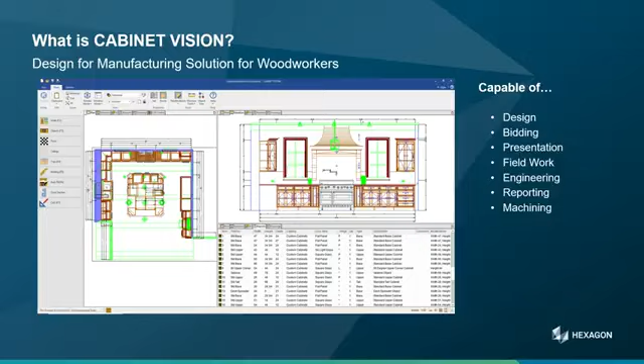The Cabinet Vision product focuses on the woodworking portion of the wood, stone, and composite segment of Hexagon Manufacturing Intelligence. This is probably a good time to cover the primary segments of the woodworking industry that Cabinet Vision is focused on.

The biggest segment is residential, where over 70% of cabinet manufacturing occurs. This segment covers kitchens, bath, bedroom, and closet cabinetry.

The segment with the largest projects is the commercial segment. The cabinetry in this segment are typically manufactured for hospitals, clinics and schools, and other institutional settings.

The store fixtures segment includes manufacturers providing commercial displays for retail establishments, which are typically custom with highly complex joinery.

The architectural millwork segment manufactures hardwood and softwood cut stock and dimension stock, wood windows and doors, and other millwork including wood flooring and moldings. These wood products are sold mainly to housing and other building construction industries and their contractors, in addition to other wood product distributors.

Cabinet Vision is a truly global product and is available in 14 different languages. Cabinet Vision is the market leader in several countries, including the United States, United Kingdom, Canada, and Australia, and we continue to strengthen our presence through our value-added reseller partners around the world.

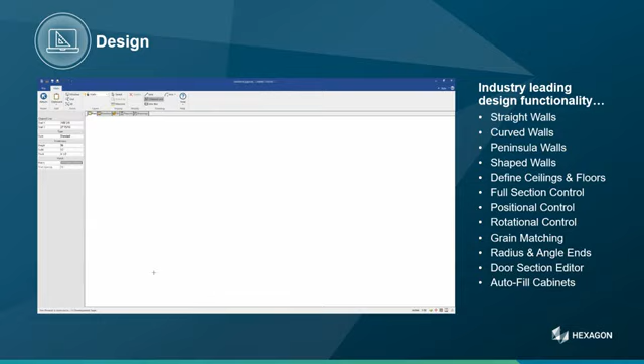Cabinet Vision has all the tools available to allow designers to design any kitchen, closet, bathroom, break room, or exam room they can imagine. Notice, as I draw the walls around the room, I drag a direction, then enter the wall length in the sidebar. This allows me to quickly lay out a room to begin the design process with point-and-click ease.

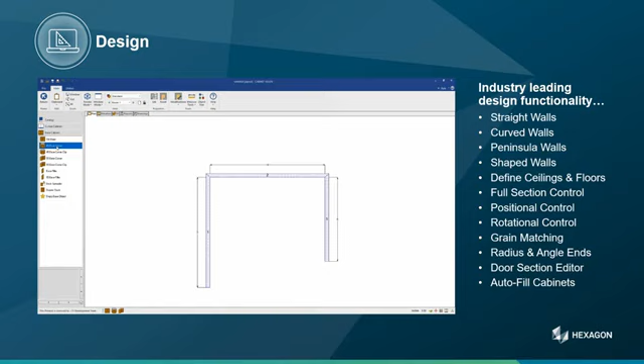Once the walls are drawn, the next step in the process is to select the catalog of objects I want to work with, then placing the cabinets, starting in the corners first just like in the real world. Each time a cabinet is placed, it is constructed on the fly with all the parts using the joinery specified by the cabinet maker, fully engineered and ready for the factory floor.

Unlike some design software, Cabinet Vision is doing a whole lot more than just making pretty pictures. Cabinet Vision is engineering on the fly. Later in the presentation, I will show off the engineering functionality, but it's important to mention again here that these products I am placing are ready for the factory floor the moment they are placed.

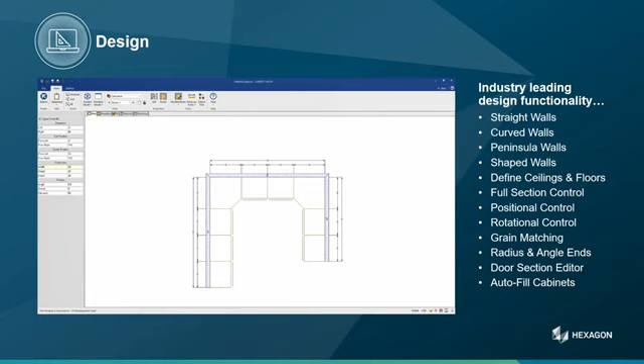I started by placing my base cabinets and then placing the upper cabinets above following the same process, except rather than placing the upper cabinets individually, I'm going to use the auto fill tool to fill the available space with equal width cabinets.

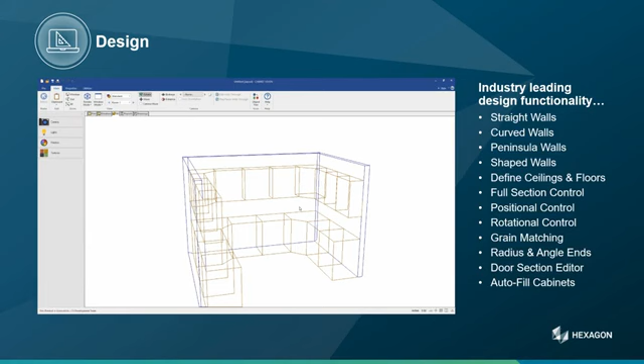Now let's look at this in color in the 3D view. I'll switch to wire mode here so you can see all the components inside these cabinets. I can also very quickly build out the countertops for the room.

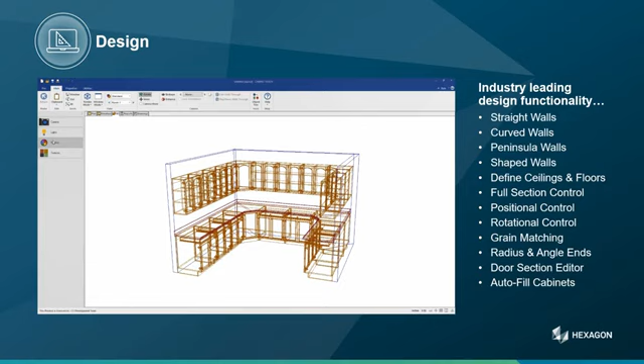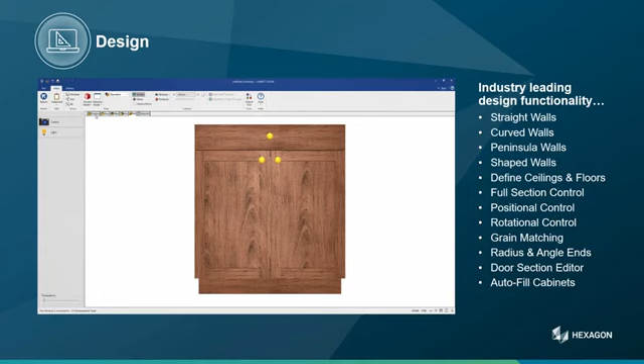Okay, so let's look at a specific cabinet by taking it to the assembly level. Here, I can take a closer look at the individual cabinet and its components.

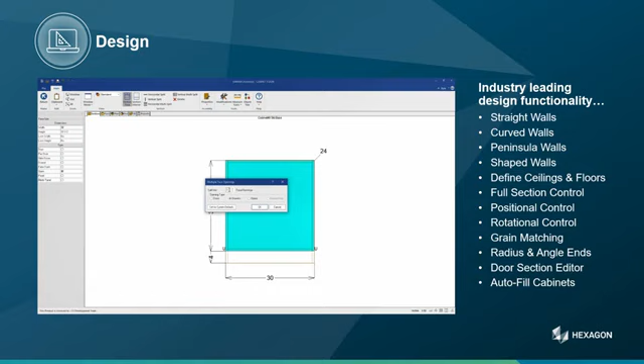I can also take cabinets to an area we call the section editor. I'm going to start off by deleting all the sectioning on the cabinet. Here, I can quickly determine how many and what kind of faces and interiors I want the cabinet to have.

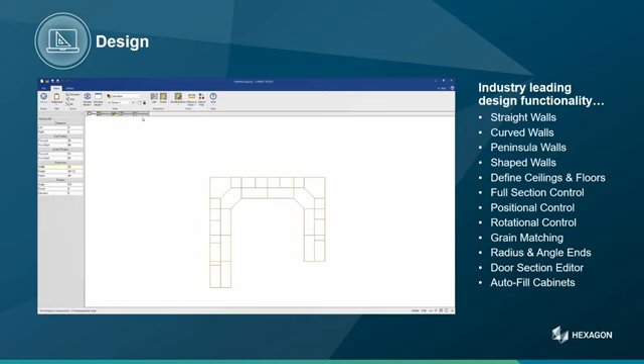And if I determine this is a cabinet I might want to use again, I can, with a few clicks, add this to my library for easy recall later. I then simply step around my design, creating the cabinets necessary to meet the needs of my clients. I can quickly make some very unique cabinets, again, fully engineered and ready for the factory floor.

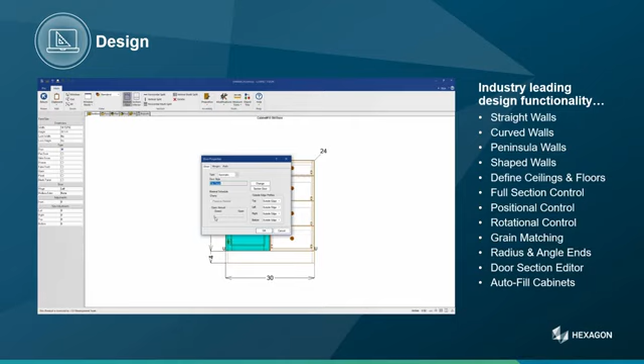Pricing is a very important process for the typical cabinet maker, and Cabinet Vision helps you ensure that your bids are accurate and that you capture your job cost, allowing you to maximize profitability with the job.

Just like in the real world, everything starts with the individual parts. As you can see here in the Cabinet Vision Part Manager, we can set up the labor costs for each part within the system. You can also set a hard price or even a price matrix based on differing widths and lengths of parts.

Gathering proper material costs is also an important aspect of bidding. Here, in the Material Manager, you can set your cost, your sell price, and the markup. Also, if you charge sales tax and what the rate is. It's also important, especially with sheet goods and board stock, to capture the waste percentage for the material.

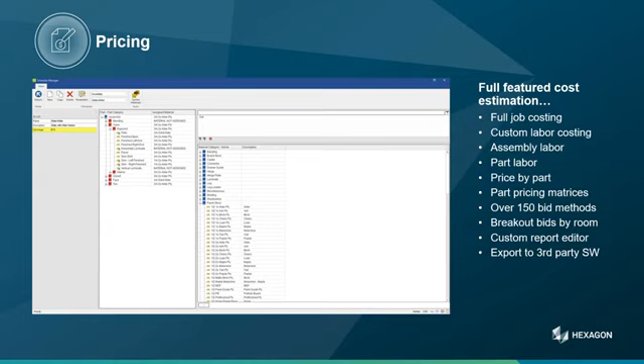Parts and materials come together in Cabinet Vision in the material schedules, and here you can set up if and at what percentage you charge an upcharge for certain materials and parts. This is especially useful to capture upcharges for special finishes or other needs.

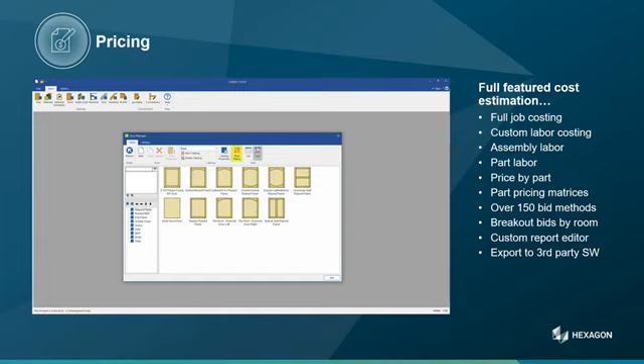Doors are another important area where price matrices can be specified for different size doors, and unit cost and cost by square foot or square meter can be set.

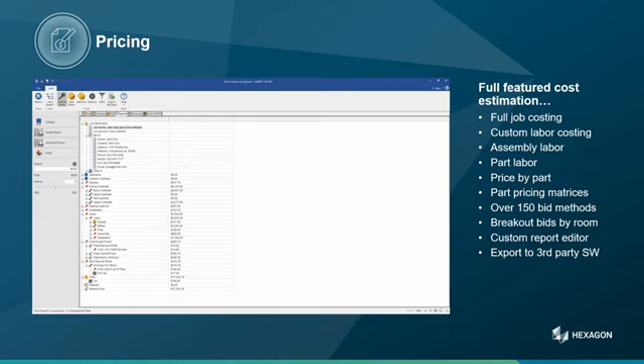These are only a sampling of the different areas of Cabinet Vision where cost and pricing information can be configured. But everything comes together in the Bid Center. With over 150 different bid methods, you can price literally anything that you can engineer in Cabinet Vision. We even cover the old school cabinet bidding method of simple lineal foot meter. With a uniquely flexible bidding system, Cabinet Vision stands far above other products in this space.

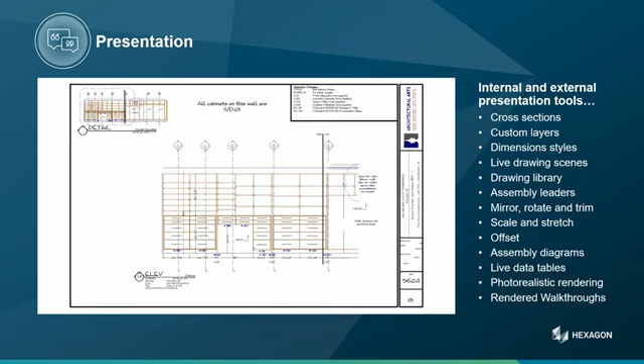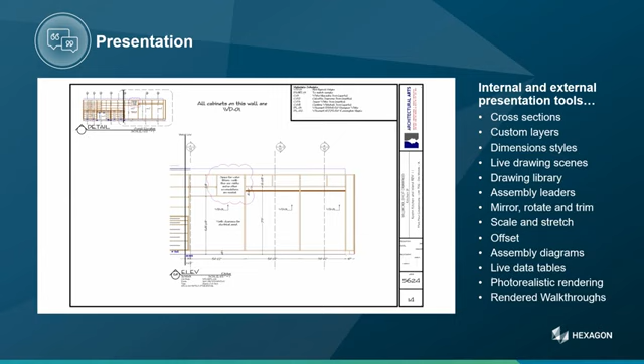Properly communicating design intent back to architects when engineering commercial cabinetry can be a challenge. Having the proper 2D annotation tools to communicate this information is critical. Cabinet Vision has a very comprehensive 2D CAD system, allowing the generation of first-class architectural submittals.

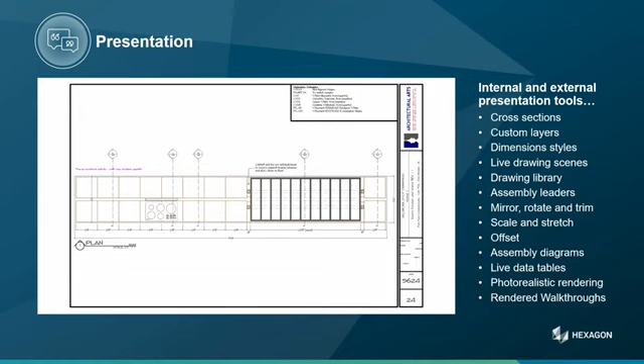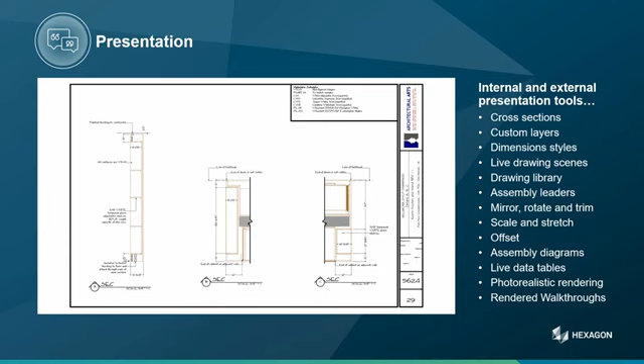And because Cabinet Vision is also the engineering tool, it has a large amount of data which can be easily incorporated into this communication. These example shop drawings were provided to us by one of our customers and is a great example of the comprehensive submittals required by architects that can be generated in Cabinet Vision.

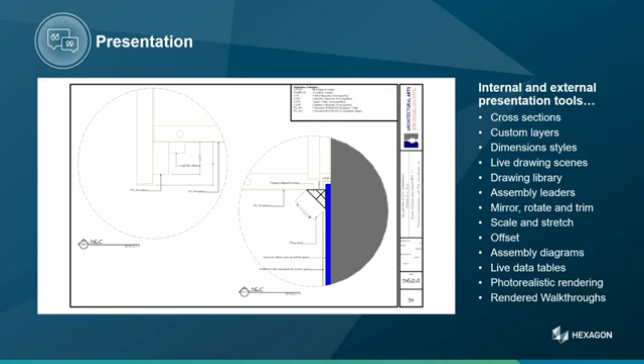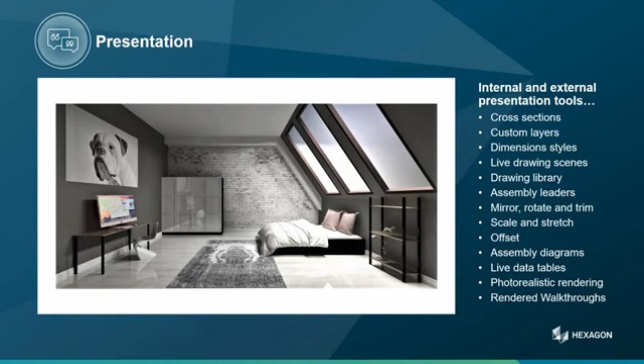When working in the residential space, it is important to be able to show your designs to your clients using more realistic methods. Cabinet Vision can create photorealistic renderings directly from the engineered designs.

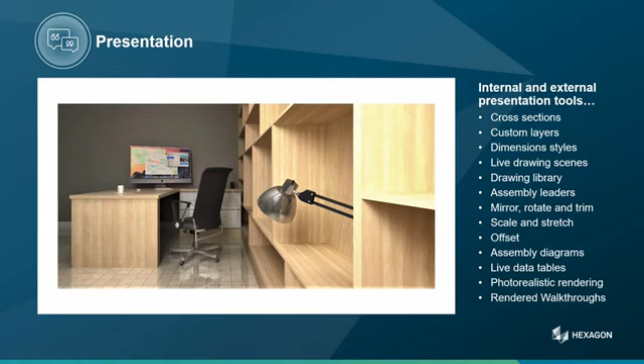These are just a few examples of typical renderings which can be produced directly from Cabinet Vision. Cabinet Vision offers robust lighting tools as well as methods to create camera angles to provide realistic viewpoints.

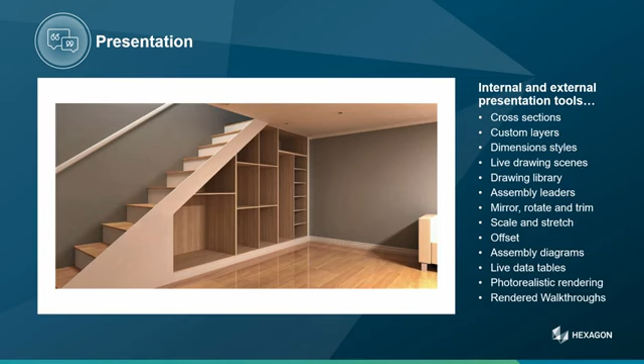Cabinet Vision also has a facility that can take multiple camera viewpoints and string them together into a smooth walkthrough so the client can see their space in a very realistic fashion.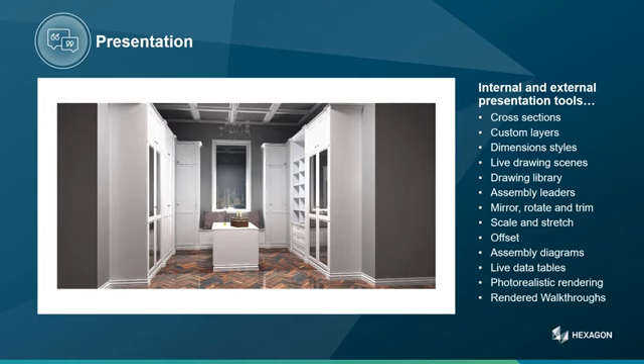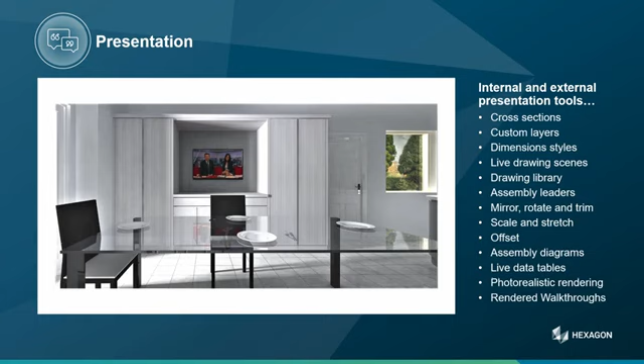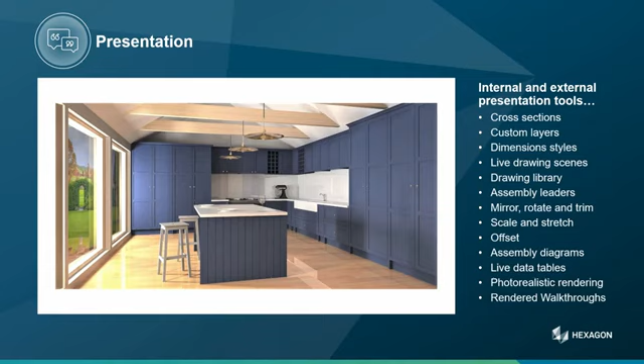Cabinet Vision offers tools which allow you to quickly make design changes to floors, wall coverings, countertops, wood species, stain colors, knobs, or other hardware. In this way, you can let your clients take ownership of designing their dream layout, helping you to drive higher value sales. There is nothing quite like seeing your dream kitchen come to life.

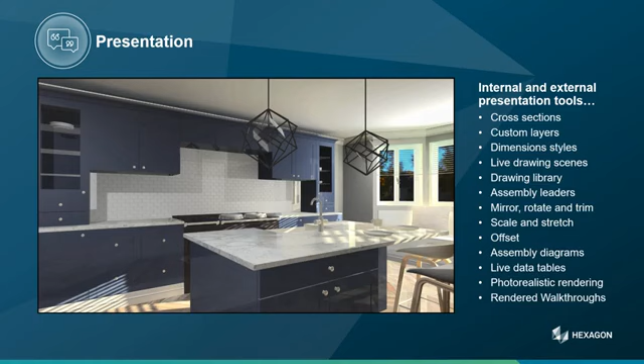It is very important to accurately capture conditions in the field back to the factory. With direct links inside Cabinet Vision to the Leica S910 and 3D Disto products, which are developed by Hexagon Geosystems Division, we can create 3D point clouds directly in Cabinet Vision with unmatched accuracy.

Because Cabinet Vision and Leica are both part of Hexagon, we have been able to work directly with the developers of the Leica Disto system to create a seamless and direct link between the products. This direct link allows you to take room measurements with the Leica Disto laser measurement device, while simultaneously creating room layouts and dimensions in your jobs within Cabinet Vision.

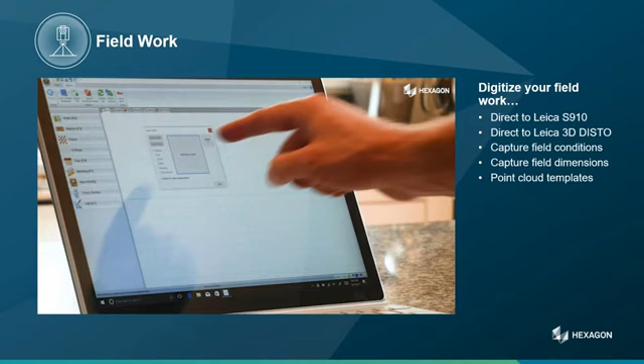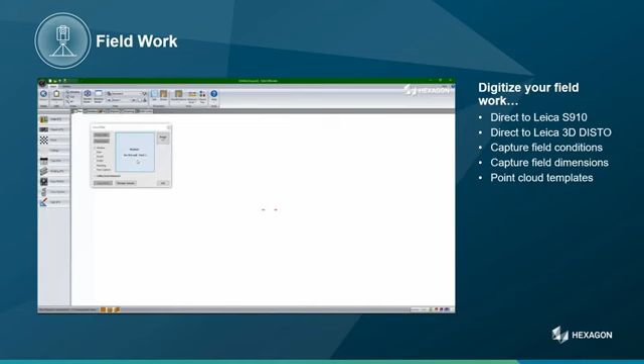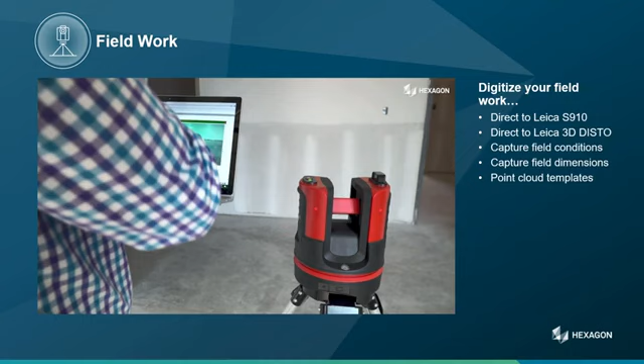Cabinet Vision's Leica utility is an easy-to-use component that will walk you through each point measurement to take in the room. With the S910, simply point the laser at the desired location, then click on the button in Cabinet Vision to take that measurement. If it is a more advanced robotic 3D Disto, you can control the device using the Leica utility with the ability to see on the screen where the laser is pointed and move the device by dragging the mouse.

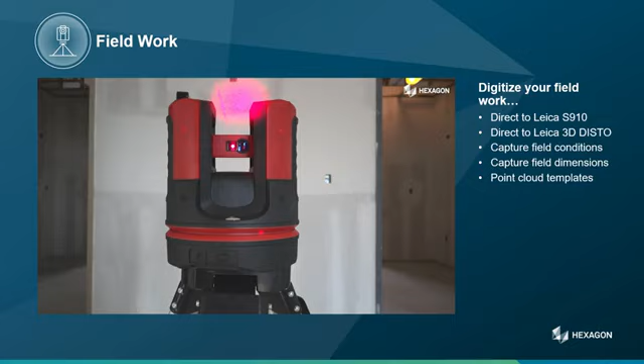The utility will take you step by step through each measurement in the room. As you are taking the room measurements, Cabinet Vision is automatically drawing the walls and placing doors, windows, light switches, electrical outlets, and plumbing markers. Optionally, as you are taking measurements, you can use the device to take pictures of the field conditions, and a link to the image is placed at the location where the measurement and picture was taken.

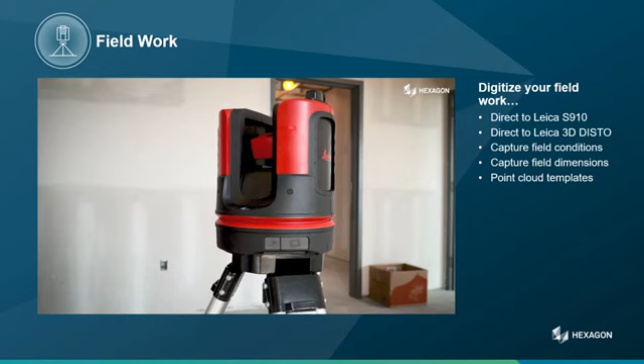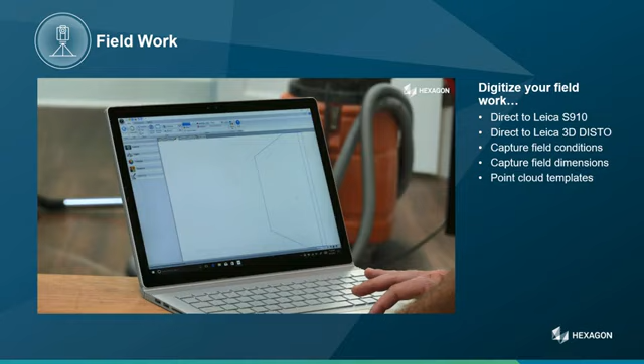Once you have completed the room measurements, you are ready to start placing cabinets in the room. If you are unable to take your laptop to the job site, you can import the 3D DXF point cloud from your Leica device directly into Cabinet Vision Room for verifying field dimensions. By eliminating manual data entry, this seamless link will save time, eliminate errors, and ensure that measurements are correct the first time, every time.

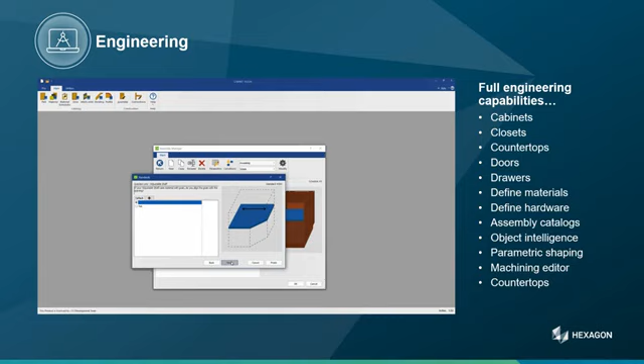Cabinet Vision's Assembly Manager is a wizard-like interface which asks a series of questions designed to help you engineer cabinetry. Each part has its own branch of questions, with illustrations that step the engineer through the process of building your specific cabinetry. These questions range from the direction the grain needs to be for the parts, setbacks in certain conditions, to even adding nosing at specific lengths for shelves to avoid deflection under heavy loads.

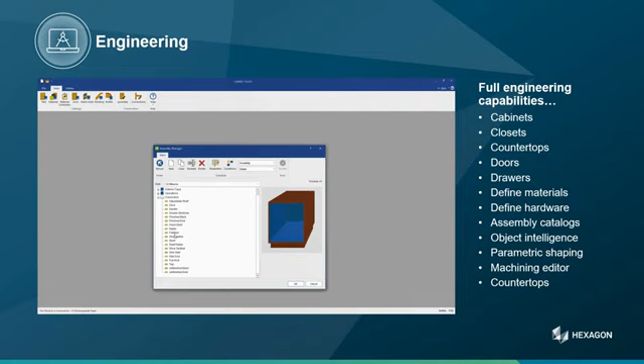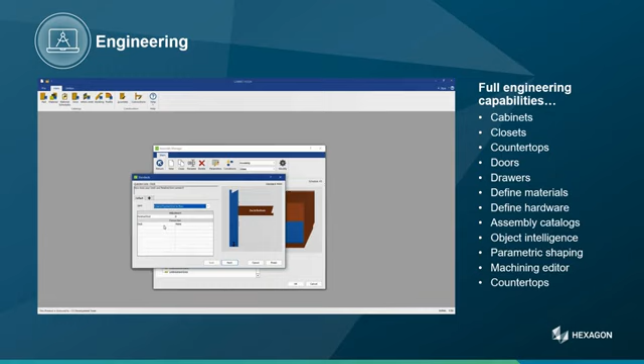Once the general interior and exterior part properties have been covered, you can then dive into how each of these parts join to the other when they meet. Cabinet Vision refers to these as connections. Engineers can establish custom machining, such as assembly boring for dowels or RTA fittings or dados and dovetails at these connections. Our illustrated and step-by-step process for defining assembly engineering is unique to the market and considered something that sets us apart from other products.

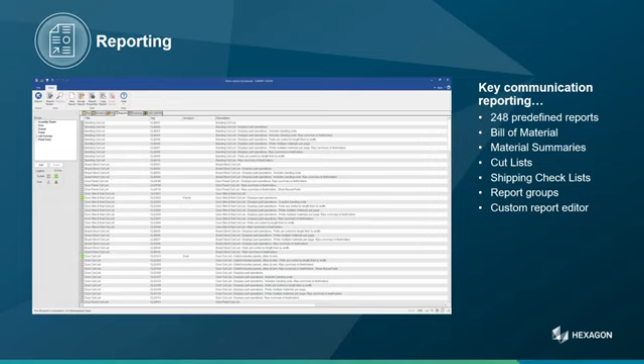Generating the proper paperwork for the shop is critical, and the Cabinet Vision Report Center is a very important and powerful solution to generating this valuable information. With nearly 250 predefined report designs, Cabinet Vision comes out of the box ready for the factory. These reports include bill of materials, cut lists, shipping tickets, and assembly sheets, just to name a few.

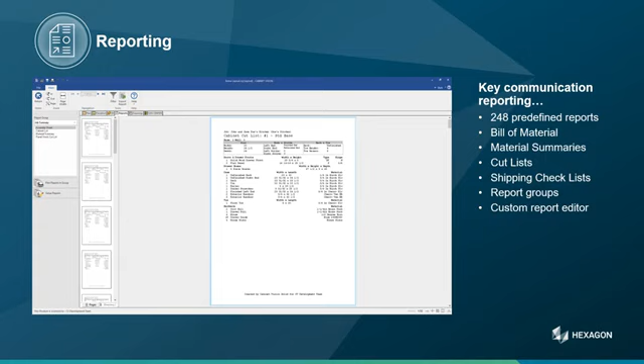The reports can be grouped together into print groups, where any individual report within the group can be simultaneously sent to multiple printers on the factory floor, in the purchasing department, out at the shipping dock, or anywhere else needed. And with a full report editor, you can create any report you can imagine, including custom data output to your favorite accounting, purchasing, or ERP system.

And the last of the processes I am going to cover is machining. Cabinet Vision is best known in the woodworking market for its screen-to-machine technology. Cabinet Vision can take components directly from layout to the CNC machine with a few clicks. Our screen-to-machine technology can take parts from Cabinet Vision and other third-party CAD products and analyze those parts and determine, based on the required machining, available machines, and available tools, how to best produce the parts on the factory floor.

With its ability to output all necessary machinery simultaneously, it is the ultimate intelligent CNC and NC software solution for woodworkers. Let's look at how the Cabinet Vision product handles a typical cabinet factory workflow. If shaped parts that need machining are identified, those parts can be nested and output to the nest based router. And at the same time, non-shaped rectangular parts can be sent to the NC panel saw.

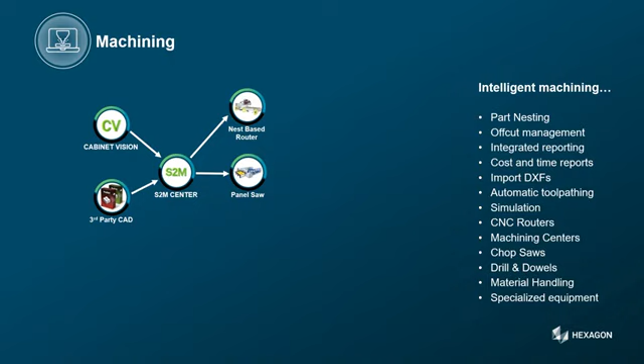And then any secondary machining from either or both the nest based router and the NC panel saw can then proceed to the CNC machining center and then on to the drill and dowel machine. Solid wood parts for face frames can be sent to automated chop saws, then on to the face frame machining center, and finally to the beaded frame haunching machine.

All this data is communicated to the shop not only digitally directly to the machines, but also through real-time and on-demand labels, pattern diagrams, and tooling reports. Our market-leading machining solutions for woodworkers remain on the cutting edge of automation as we continually develop solutions to drive more and more types of machinery, including robotic material handling and part unloading systems. We empower you to achieve smarter factories by providing digital, autonomous solutions that increase productivity and quality.

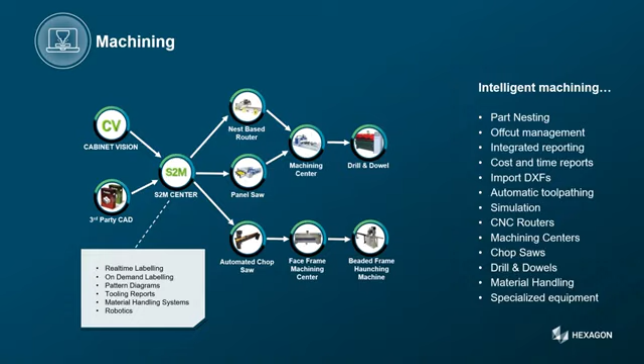Now I want to talk to you about our specific solutions. Cabinet Vision is packaged in a way that it is designed to help solve problems in specific areas of your business.

We're going to start with what every manufacturer needs, and that is the core product. The core includes all the basics: layout, cut listing, along with basic rendering and estimating.

Next, you select your industry solution. You can currently pick cabinets, or closets, or both.

To the core, you can then add multipliers. These multipliers are focused on specific functionality based on your processes and allow you to take the product and your business to the next level.

The first of these multipliers is rendering. This multiplier gives the capability to produce photorealistic renderings like those I showed earlier in this presentation.

The next multiplier is 2D CAD, which includes an expanded set of 2D CAD tools, a requirement if you are submitting drawings to architects.

The next multiplier is countertops, and if you manufacture your own countertops, this is a good multiplier to have. In the future, as its capabilities are expanded, we envision the countertops multiplier becoming an industry solution like cabinets and closets.

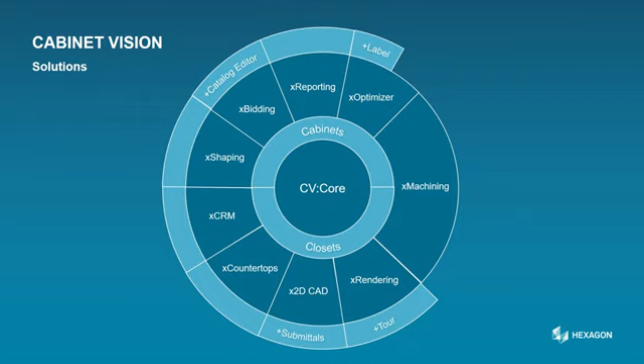If you want to label parts from the optimized patterns, you can get the label edition for the optimizer. And if you need NC output with the optimizer multiplier, you simply add the saw edition.

For those with the machining multiplier, you can add labels, simulation, and whatever machines you require. For example, if you get router, then you will get nesting and offcut management and all other functionality necessary to run your physical CNC router.

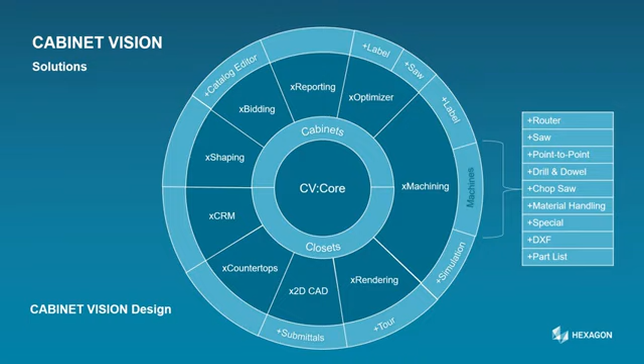Cabinet Vision Design is another product in the Cabinet Vision portfolio, and it is an excellent solution for kitchen designers who do not want or need the overhead and complexity of manufacturing data.

With Cabinet Vision, we can create custom-tailored licenses for not just your business, but each individual employee in your business, based specifically upon the tasks that they perform.

For example, your designer would only need the Cabinet Vision Design product, and the estimator in your business may only need core cabinets plus the bidding multiplier. The engineer might need core cabinets plus the 2D CAD, shaping, and reporting multipliers. And finally, your CNC programmer would probably only need core cabinets, the machining multiplier, and a router edition.

Cabinet Vision gives you the flexibility to have a perfectly tailored solution for each person in your business.

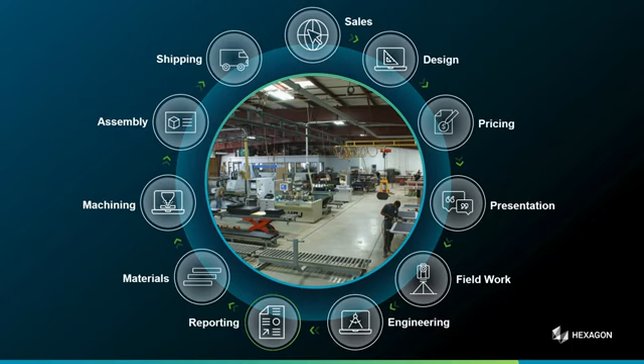Thanks for your attention. With more than 35,000 end users in over 50 countries, Cabinet Vision is the most widely used and most comprehensive design-for-manufacturing software solution for the global woodworking market.